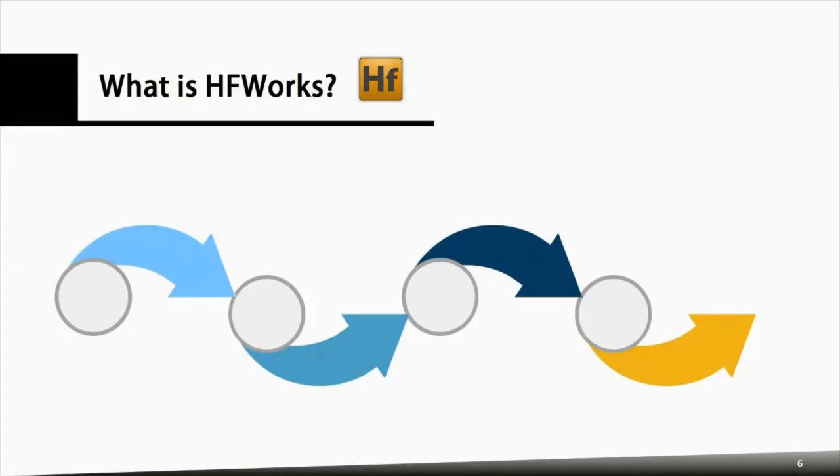A bit more about HFWorks: it's essentially a 3D electromagnetic simulation package based on the finite element technique in the frequency domain. The workflow is straightforward. We start with the CAD, which has to be created, imported, opened or edited inside SolidWorks. That's the SolidWorks front end. HFWorks sits as an add-in inside SolidWorks, so it's not a separate piece of software. It's really part and parcel of SolidWorks.

Once we have the CAD model, we go through a pre-processing phase, which is essentially setting up the materials and the boundary conditions and all of that. And if there are any parametric studies or multiple configurations to be analyzed, that is done and set at the pre-processing phase.

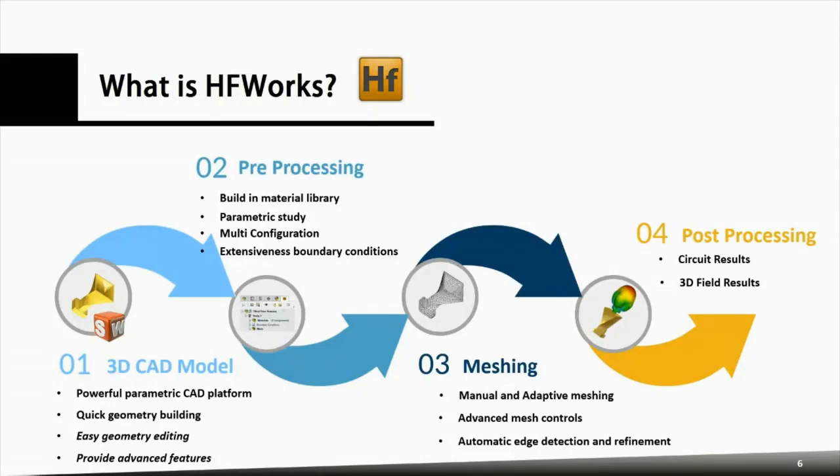Then we do the meshing. For people who are not experts, it's probably preferred to use adaptive meshing. Those who are quite knowledgeable can cut solution time by controlling the mesh manually and getting automated mesh refinement that the software intelligently helps you accomplish. After that, we go through the post-processing and look at the results: the field results, the circuit parameter results, or the antenna parameters, as it would be in this case.

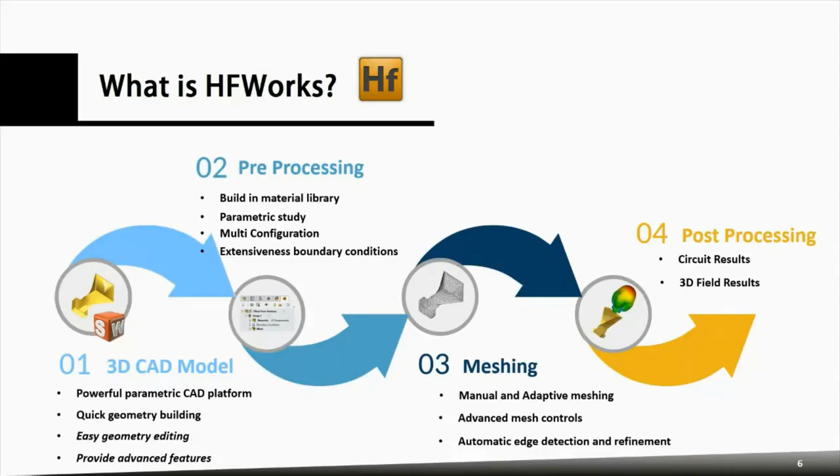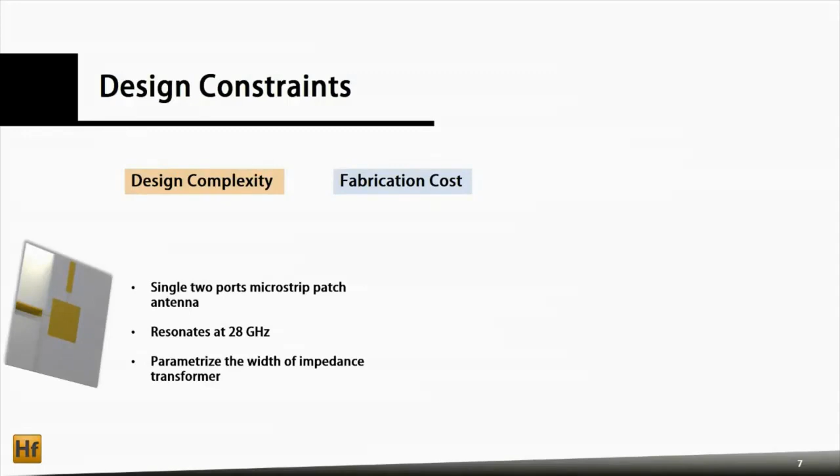So to show this, today we're going to consider a design. We picked an example that illustrates a way to address and streamline design complexity and reduce fabrication costs. It's in the open literature: a 5G 28 gigahertz resonant antenna, and it has a unique feature: it's dual excited. The basic element has 2 excitation ports, and out of that you can build an array.

Okay, and I'm showing here a single cell and a 2x2, but you can also go higher. And the interesting thing about this design is that you can actually do beam steering with less number of ports, and I can share with you the reference paper if you're interested. And basically, the idea is that you can use this kind of excitation to go, if you go to 3x3, you can actually excite the additional element without additional ports. So that's really one of the concepts of this example that we picked.

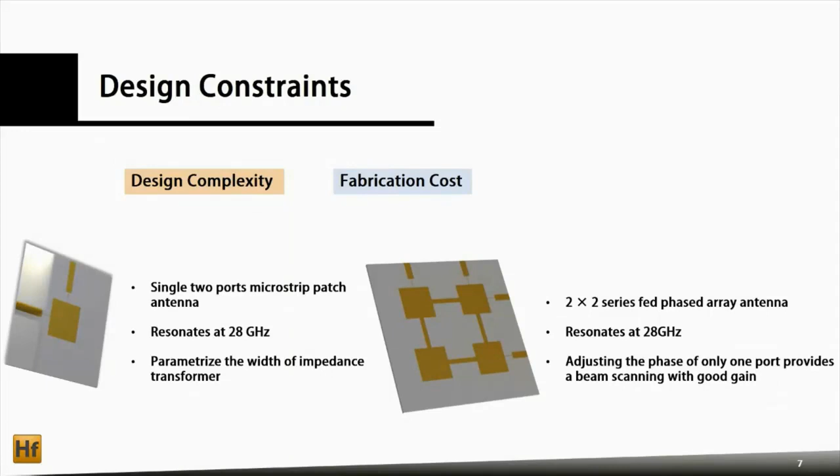And so at this point, I would like to switch over to SolidWorks, do a live demo of what we're getting and how we simulate this, how we set it up, how we get the results. Okay. And that will be switching over to this SolidWorks.

So this is a live view, obviously, of the SolidWorks interface. I have here the 2 examples. I'll switch over to the model. So this is my array, okay? And in another window, I have the single element design.

Show this. For some reason, I'm showing a black screen. Adam, can you confirm that the screen is black for you? Yes, sir, it is black. I'm not sure why this is the case. It's hiding my model. So let me, at any rate, let's see, maybe this will help set it up.

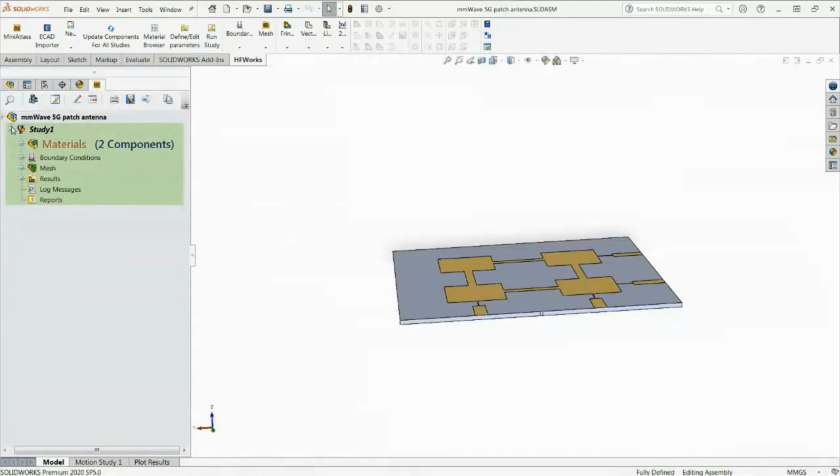So basically, what we're looking at, this is the SolidWorks interface. And maybe I can go back to this model where we can see the model now. Yeah, so this one is the 3D assembly of the array. I wanted to show the single element. So the idea is that inside SolidWorks, this is where you actually build the structure, the CAD geometry. And as I mentioned, it's quite powerful. You can do very complex structures, fully 3D, fully parametric, and so on. And here, for example, we're hiding the air, but you can see that there is an air box around this that we need to do the simulation.

And we are inside SolidWorks here. And once this model is ready, then this is the HFWorks environment where we do the simulation. So you see the name of your assembly, and you see that HFWorks has this tab which is added in. So it's really part and parcel of SolidWorks. It's fully embedded in SolidWorks. And then you have this menu, and if you have more than one product of EMWorks, then you see them here. And in this case, we have the HFWorks product.

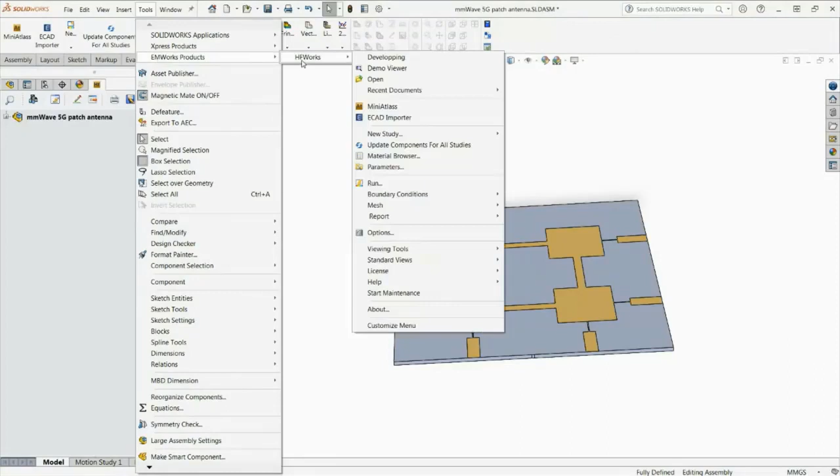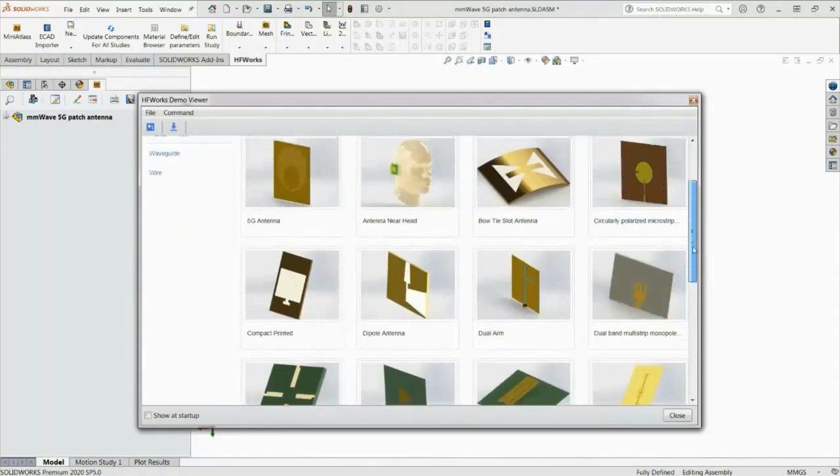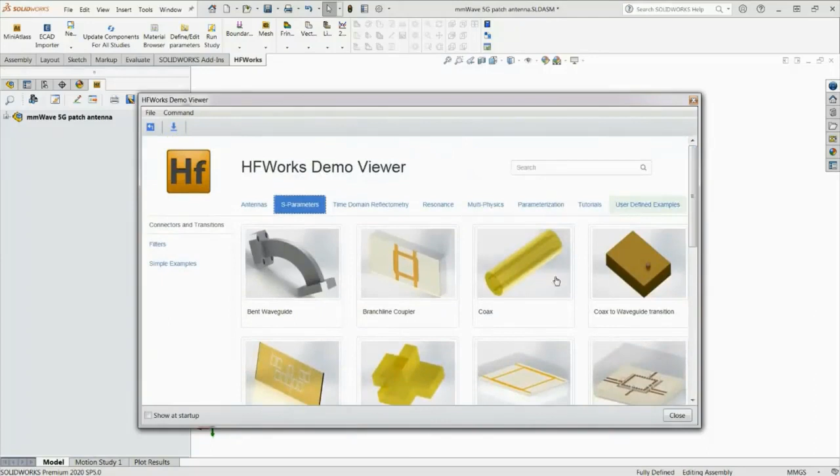And if I go and open the demo library, this is where you can navigate a whole bunch of examples, the kinds of things that you can do. Obviously, in the antennas, you can have many different types of antennas, and all of these are easily accessible. The geometry is ready, everything is set, and you can have them in planar, or you can have some antennas in waveguide, or some wire antennas, and so on. And then if you go to S parameters, you can also have a whole bunch of different structures, what kind of models you can build and test inside HFWorks, to do some filters and all kinds of connectors and transitions and so on. And there are examples for TDR for people who are interested in time domain reflectometry.

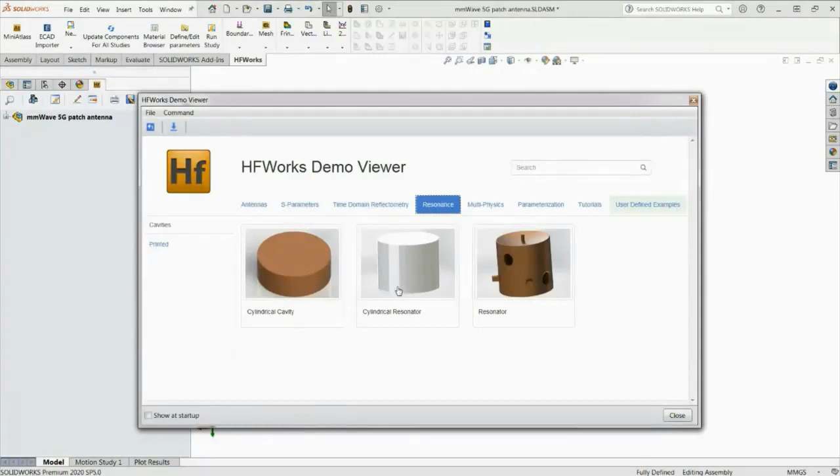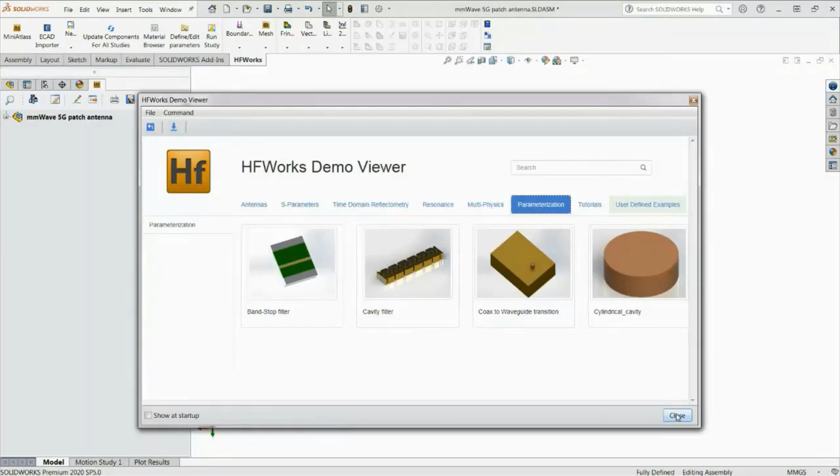And HFWorks does also have a resonance solver, so it looks for the eigenvalue solutions for different resonant cavities. And it comes also with a few examples of multiphysics, so electrothermal problems, whether for antennas or S parameter heating applications or heat loss in structures. And there are obviously some examples where parameterization is used, for example, to tune a filter, or to optimize the coax to waveguide cavity transition, and so on. So this is a good starting point for those who are interested to learn more about the software. You could start here and look at these examples, and there is obviously a tutorial library and so on. So this gives you an idea about the spectrum of applications that you can do with HFWorks.

So now let us get back to the subject matter of today, and let me just see if this model, maybe if I close this window and reopen it.

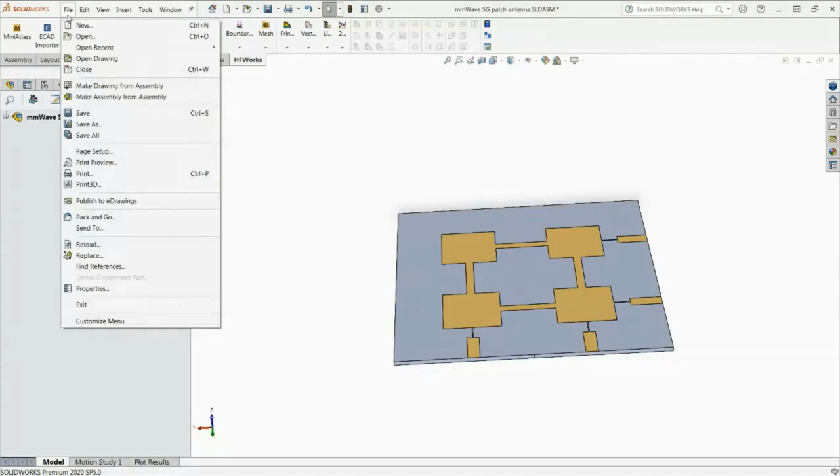So maybe now I'll be able to open recent. This one. All right, so I think that there was a...

So actually, I want to start with the single cell model and just walk you through very quickly how we analyze this. You can see here that I already have two simulations. The process is really straightforward. You go here and you say, I want to study this antenna. And you have here types of simulations you can do. You can do antenna, S parameter, time domain, or resonance analysis.

So for doing antennas, and the menus, by the way, get configured according to the study type. So here there are a few options to set up for your simulation. You can set up your frequency sweep, the meshing option, adaptive, manual, and so on. You can fully control this. And if you're doing any thermal coupling, electrothermal analysis, you can. So I'll just go ahead and say okay, I didn't set any frequencies or anything.

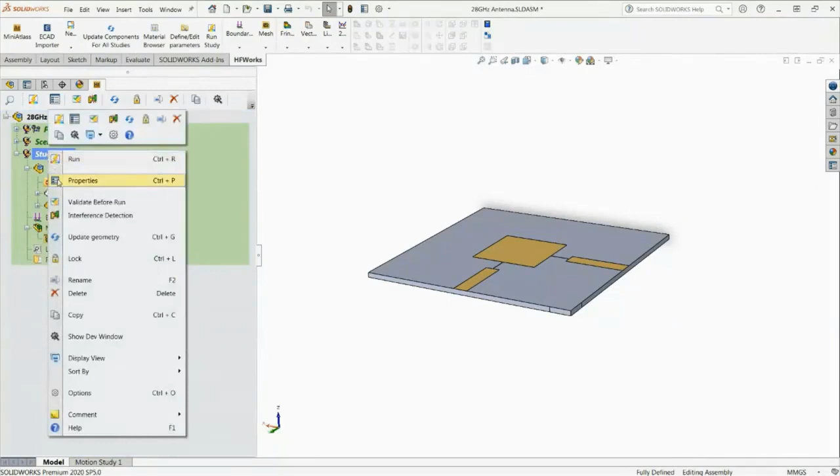So you notice here that we create this study, or a simulation scenario, if you will. And at any time, if I want to edit this, I can go back to the properties and play with this. So for example, if I wanted to only look at the port simulation, the port impedances and so on, I can do this port simulation. If I wanted to do parameterization, if I wanted to save or not the 3D fields, if I want to look at fields or am just interested in this S parameter.

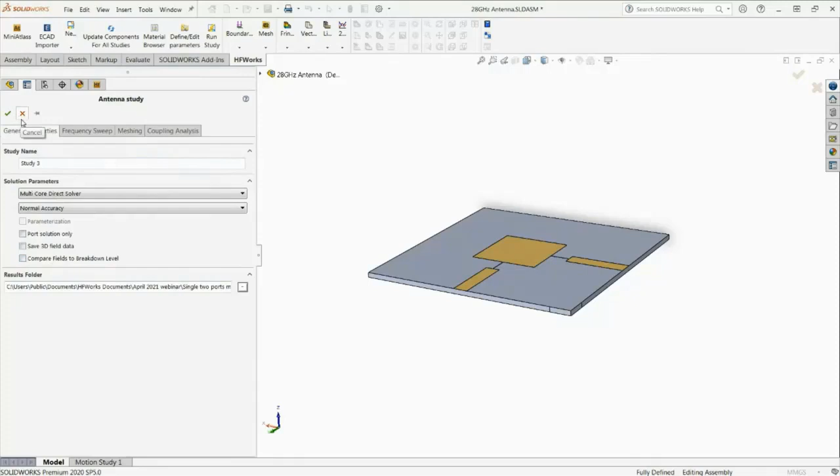And one of the other features is this power handling capability, which allows us to compare breakdown fields. So if you're doing a high power application, you might want to look at that. So all of these, you can edit them and change them at will. So if doing parameterization, you see here that the icon of parameterization will pop up and let us know that this is a parameterization study.

So what we've done in this antenna is actually simulated this, and we tried to optimize this transition to feed the antenna properly, and that is very sensitive to the width of this narrow microstrip line. So we did the parameterization to compare different scenarios, and you see the width here is 0.02 to 0.05 millimeters. And once that was done, we actually simulated the optimal scenario and dove deeper into the details of that simulation.

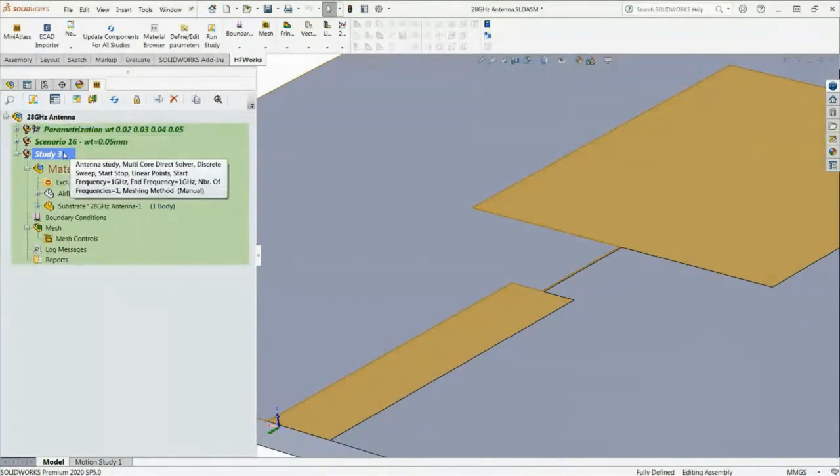So how we did this, I'm going to get back to this shortly. I'm going to just walk you through the process in this study, which we're not going to simulate. So by the way, if I wanted to set the frequencies and so on, you can see this is not set up at 28 or any of these things. Or if I want to shortcut things, I could just drag this study onto this one, and then I inherit everything. So this study now is fully set.

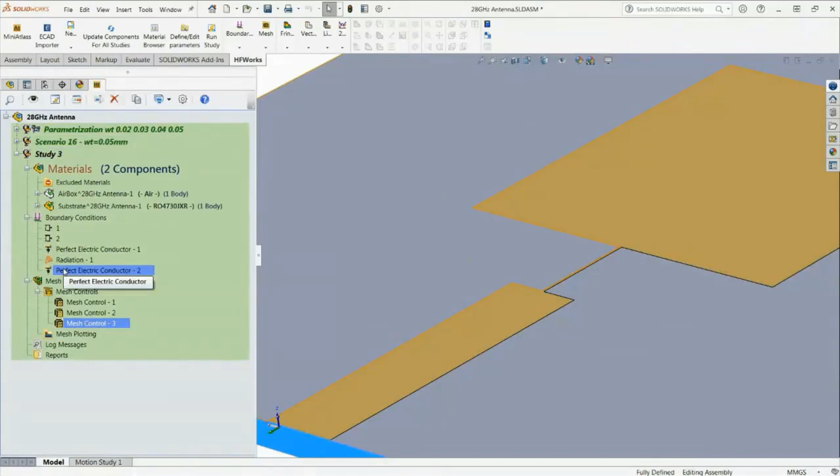If I go back to these properties now, you notice that my frequency setup is now a proper frequency. So it's very easy if you want to do a new simulation based on an old one and just adjust the parameters that you need. But if you're starting out and you want to set a study, you can see the three main building blocks are material definition, boundary condition, and mesh. And as I said, you can do automated adaptive meshing or manual meshing. In this case, we've done manual meshing because we know exactly what to expect and where to mesh, and it saves us a bit of time versus waiting for multiple adaptive passes.

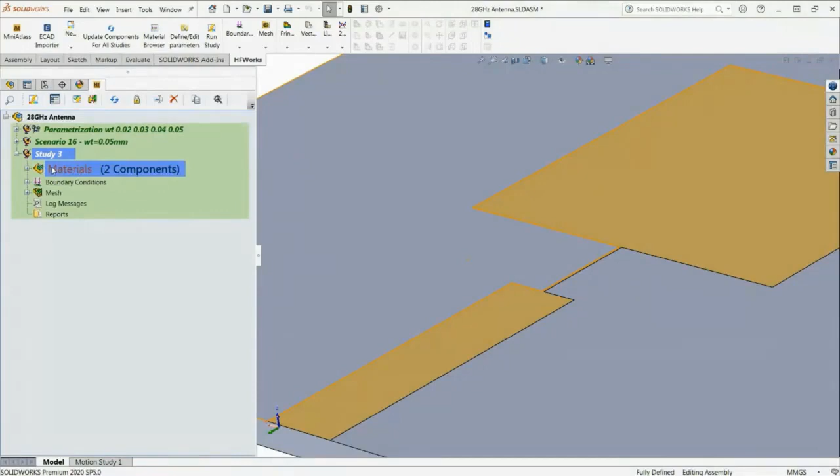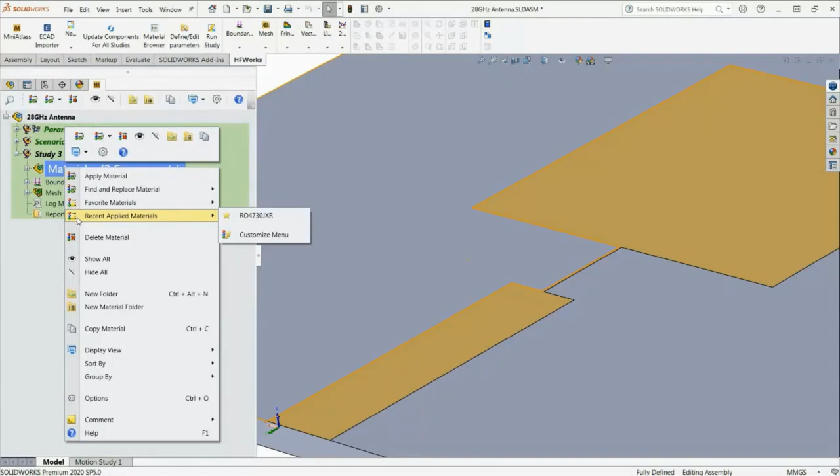So the process of material application is straightforward. You can go to the material library by apply materials. You can find the material and replace the material. You can use your favorites, and you can populate this with your favorite materials that you use. Or if you've used a recent material, you find it in these materials. So in this case, we're using a Rogers substrate on which we've done this. So that's the material that I recently applied. So to apply materials, you go to this.

You can apply materials part by part, or if the part has bodies, you can apply body by body. In this case, each part has a single body. So I can go here, and this is what the material library looks like. You can search for a material by name or browse them by category, so they're grouped by categories.

For substrates, for example, we have the whole gamut of substrates. We have the Rogers materials here. And then if you apply a material, let's say this Rogers material, now that material is applied, and you see it there. Of course, I applied it to air just to illustrate the point.

But I can drag this onto this one and say this is actually my material. So this now becomes the Rogers. And I can go back to this one and say this is actually air. It's straightforward, to see how easy it is to play with these things.

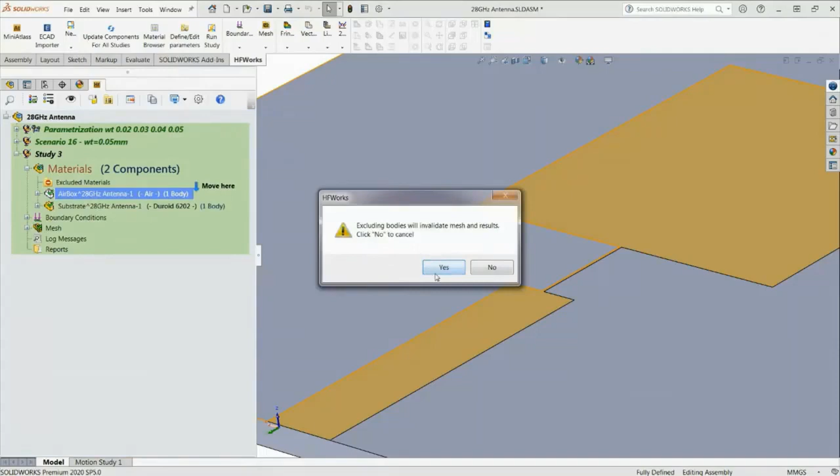The other neat feature about materials is that as we are embedded inside SolidWorks, you can have some mechanical parts that are not relevant for simulation. So we have this folder where you can just drag things that are not relevant and exclude them from simulation. It will give you a warning and so on, but if I did this, then that part will not be considered in my simulation. So it's an easy way to work with true mechanical designs from your mechanical engineer.

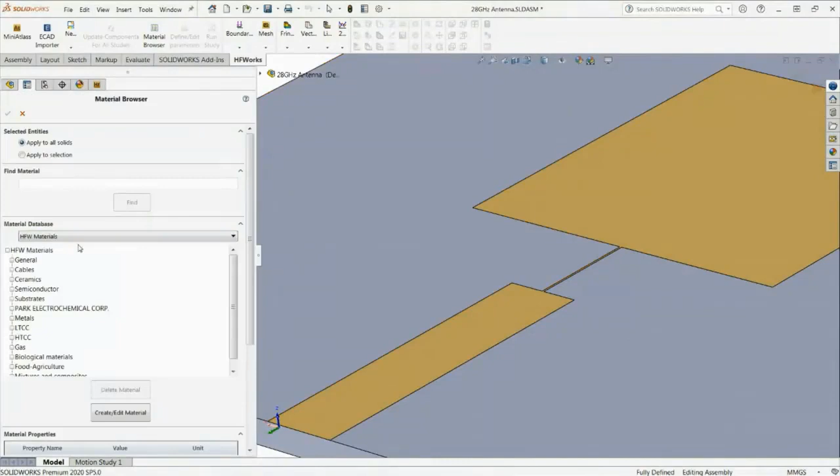So the idea is materials is very straightforward. There is even a nice feature that I usually like to mention: you can create a materials folder. If you have lots of bodies, let's say you want your substrate to be a Rogers substrate, this one, and you have a lot of materials to apply, you can just select a bunch of bodies with control select, and if you drag them into a folder, then they get applied that way.

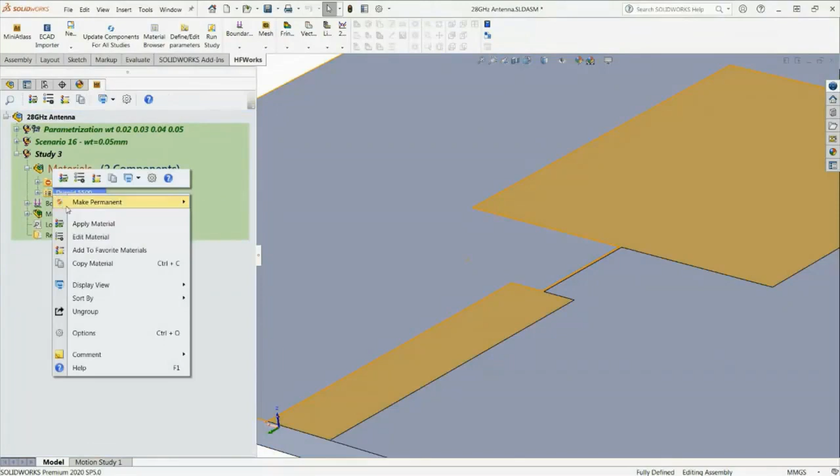And you can make these folders permanent, for the current study or all study types. So now, whenever I open a study, I'll have this folder because I'm always working with it, and I apply material by just putting bodies in there. So this is briefly what you can do with materials.

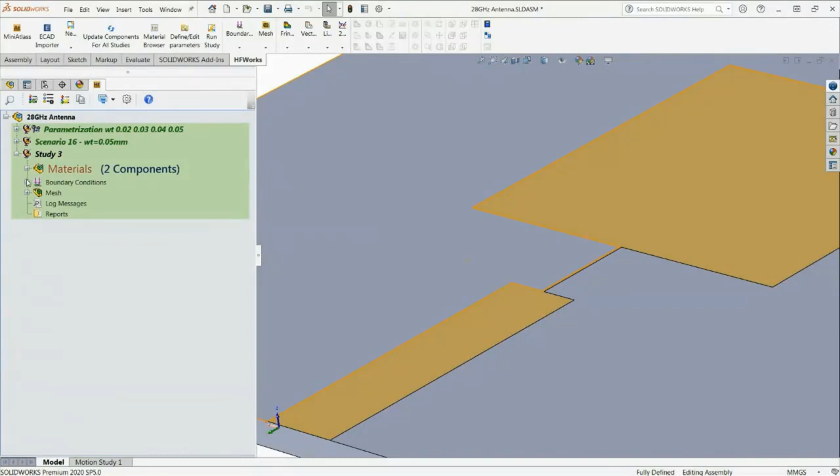The next step is boundary conditions. In this case, we have to define ports. You notice here it's giving me these warnings because I excluded some geometry that was in the original definition. But the port definition is really straightforward, and I want to illustrate this.

The way you define ports, you have the geometric entities and then the properties of the port. The geometric entity is straightforward: ports need faces. So this is, let's say, my port 1. It has a face, and then you can set if it's differential or single-ended, and if you want to calibrate this port, impedance, power, voltage, and so on. And you can control the number of modes of that port, so you can do multimodal S-parameter simulation.

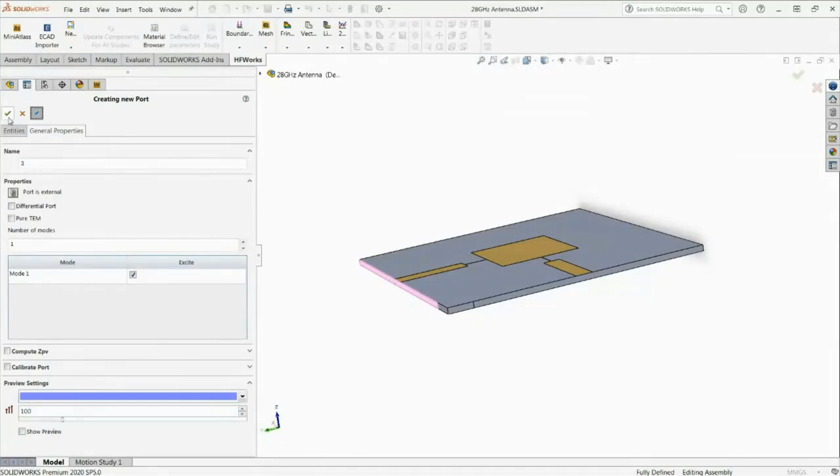Sometimes in complex geometries, you want to see what that port is. So this illustrates to you what port it is, so you can recognize your feature. You can pin this. So if I have 5, 6 ports, I say OK to one, and then I move on to the next one, and I'm doing the second port. So this will be my second port, for example. So in one shot, you can do all of these things.

For the boundary conditions for antennas, you have all these types. You can have multiple ports, symmetry, perfect electric, perfect magnetic, symmetry conditions, impedance surfaces, and obviously you need the radiation boundary, which is the outer boundary on the box.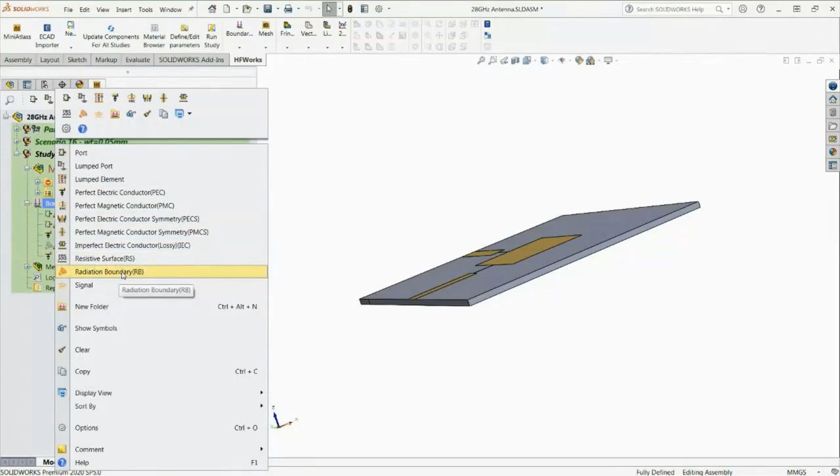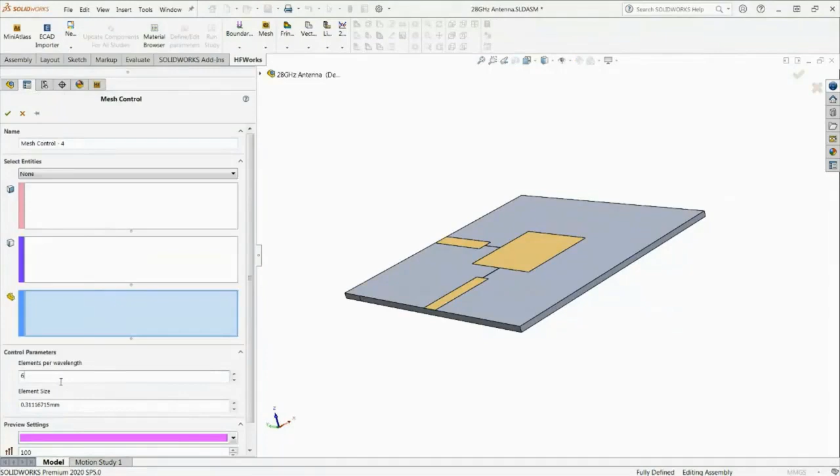So quickly, just to illustrate the capabilities for manual meshing. So here you can see that we have some mesh control. So let me go through quickly how this works. If you want to apply a mesh control, this is where you essentially say what elements per wavelength or what actual element size you want on certain features.

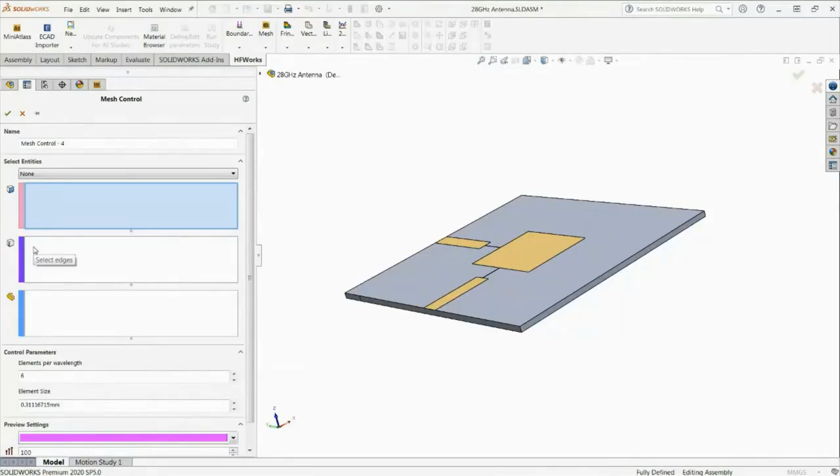It could be on a body, on a volume, and this will override the default element size, which is computed based on wavelength. Or you can go on a face, or you can go on the edge. So typically in high-frequency electromagnetics, really the critical parts are the edges. So let me show you how we actually pick those edges. This is actually quite tedious if you want to do it.

So the idea is, in this case, we only really want these faces. This is the conductor face. And all we need here is really those edges. So we can right-click here and then extract the edges. You've done that in one shot. So on these edges, since I'm doing second-order elements, instead of going 6 elements or 0.3, I can do, let's say, twice that. So it will update for me the average element size.

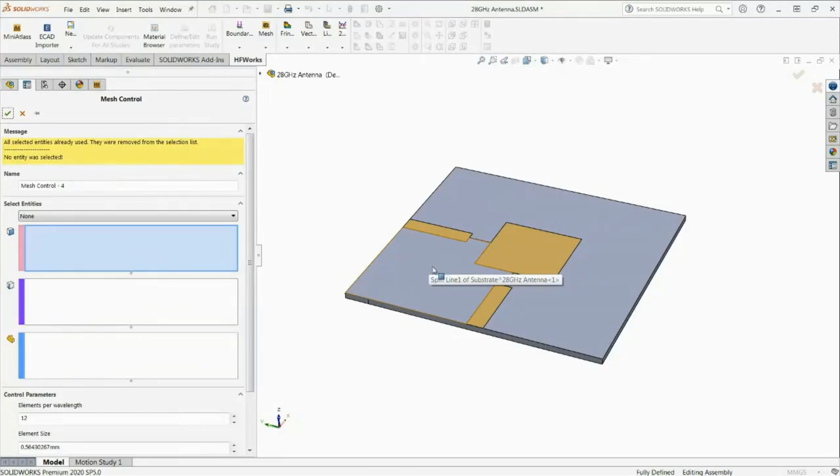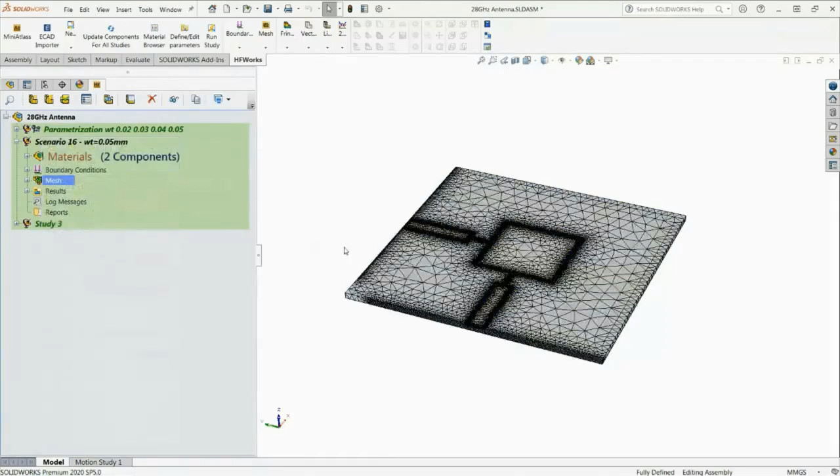So it's telling me that those entities already have those mesh controls. So when we do this, and then we create the mesh, you see that your mesh is actually following those instructions. Let me show you what that mesh looks like. You can see that without waiting for adaptation, I already got this nice transition mesh. It might be over refined in places, but you still save time with a single pass, and you get very accurate results.

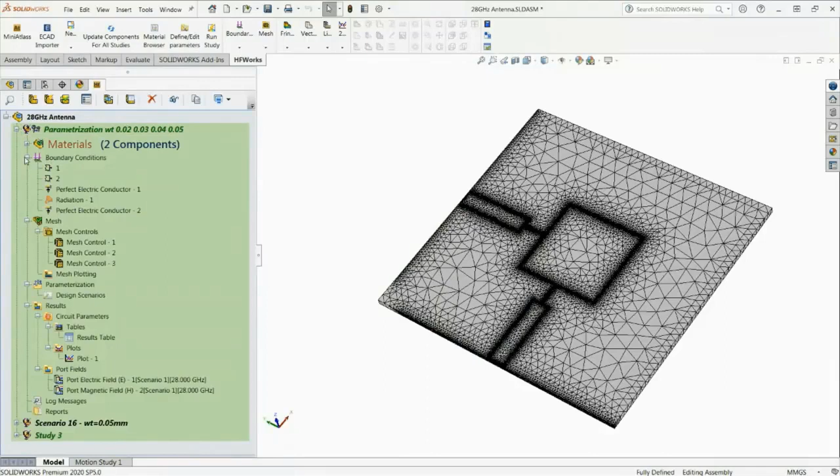So this is very briefly how we set up the problem. So let me go back now to our first study. We have an antenna part which is hidden. I can show it from here as well. So that's my air box. This box is dimensioned such that we have enough distance from the radiating element. Typically the further you go, the more precise your radiation pattern is going to be, but you don't want to be too close, less than a half wavelength. In this case, we took a full wavelength to have no issue with the boundary itself.

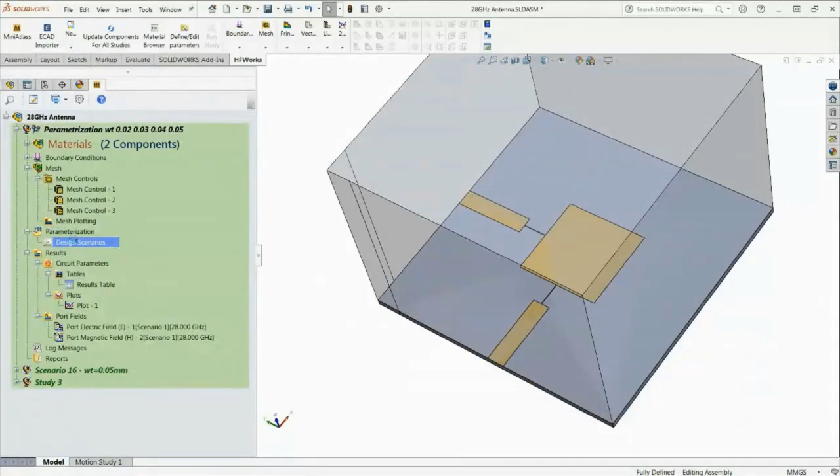Then we can look at the port. This is one port, that's the second port, and this is our radiation boundary. Then we have the perfect electric conductors inside. We have the mesh control that we saw. And now this is the parameterization. In this study, we were not sure what should be the width of those transition lines, so we created a number of scenarios to parameterize. There is a unique feature you can use: PDP, physical dimension parameterization. We can parameterize things in millimeters or centimeters, whatever the unit is.

So we assign two widths. We could independently vary this one and this one, and that gives us two dimensions, D1@Sketch. You can see this is referring to the entity in SolidWorks, and this is the second dimension. We vary them between 0.02 and 0.05 in steps of 0.01. You can parameterize other parameters as well, and then you generate the scenarios, and we have generated 16 scenarios. We picked a few of them, wanting both to be 0.02, both 0.03, and so on. So altogether we have 4 different scenarios that we simulate.

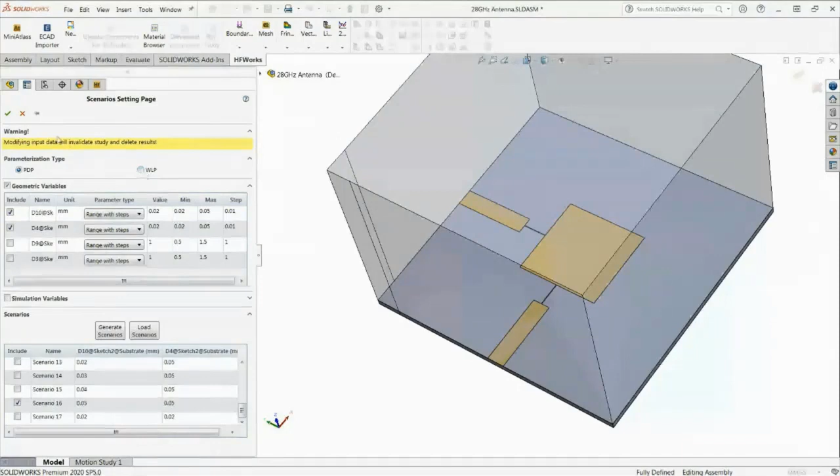You can also parameterize simulation variables, not just geometry. This is physical dimension, but you can also parameterize in wavelength. This is very interesting if you're doing wideband antenna design. If you want certain dimensions, especially the air box, to always be lambda/2 or lambda, you can pick this wavelength parameterization, and it will allow you to parameterize things electrically. As frequency changes, the model dimensions will be adjusted and simulated accordingly. That's really a unique feature this parameterization offers.

So now, by the way, when you go to the meshing and want to show mesh, you can see we have different meshes for different scenarios. They're going to look very similar because we're just changing this inner width here.

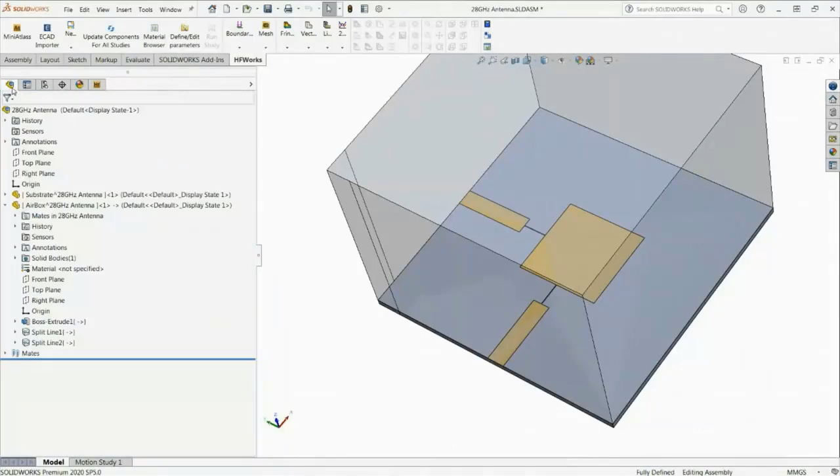So let me go back and hide the air box here, to focus on this. And now the difference is what you see here is that we have this parameterization. We have the results. So you can see here in this study, to get the simulation done, I was basically interested in the S parameters, so I'm showing this S parameter plot.

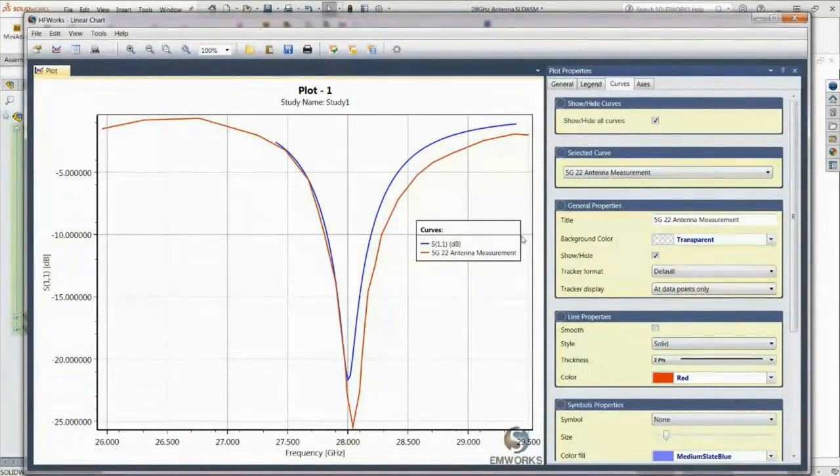And when I plotted this, these are my S parameter results. So this is my plot one. And you can see that in blue is our simulation, and in red is the measurement data that we got from the publication. So you can see that this antenna design is pretty good, and the software is predicting quite nicely the resonance of the antenna at 28 gigahertz. So that was really the important thing to notice here.

And as a matter of fact, I can actually go back here and show you how to create a 2D plot. I can pick from which simulation, or I can get all simulations, which parameters, so you can plot S parameters or even VSWR or some other parameters there, and which S parameter in particular. So in this case, we're doing S11, and from which scenario.

So I can do, okay, show me all S parameters from all scenarios, add them, and it adds them in one chart, and then you can actually see what the different scenarios give. And we see that scenario 16, which is 0.05 millimeter, the last one, is giving me essentially the best performance here.

And this is the 2D viewer, and it has all these nice features that you can play with your graph and so on. One of the things you can do is actually look at the data at the same time. And obviously you can move around and look at what your results are at different frequencies, or you can pick in the frequency and control select, so you can look at your data in different ways. With the roll of a mouse, you can zoom in and zoom out, and it's quite user-friendly to allow you to play with how you look at your data.

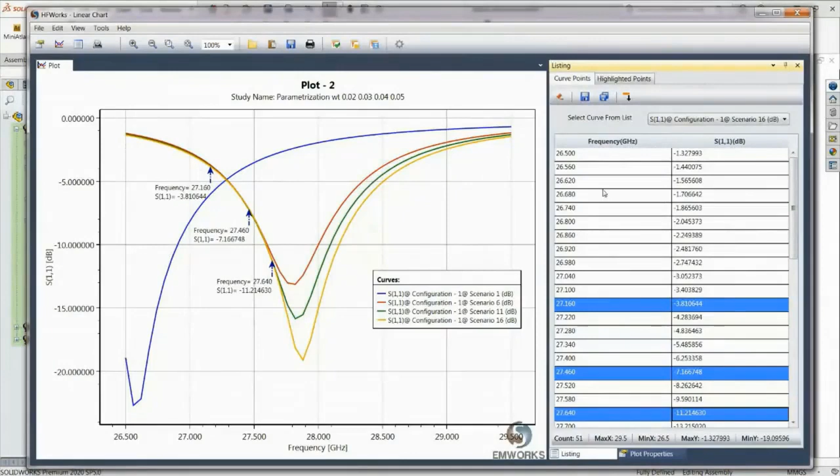So this is the result of our parameterization. This is basically telling us that scenario 16 is the one we should be working on. So my second study here was scenario 16. I did a full simulation. I saved the fields, and you notice the difference now: once we save the fields, we can actually look at far field data, electric field, magnetic field, all those things. If we had losses, loss density and power loss, we can compute that as well.

So let me briefly go over this one. The configurations are really a way for us to set, if you want to add a de-embedding or renormalize your impedance, that would be a configuration. So by default, we're just looking at the intrinsic S parameters here.

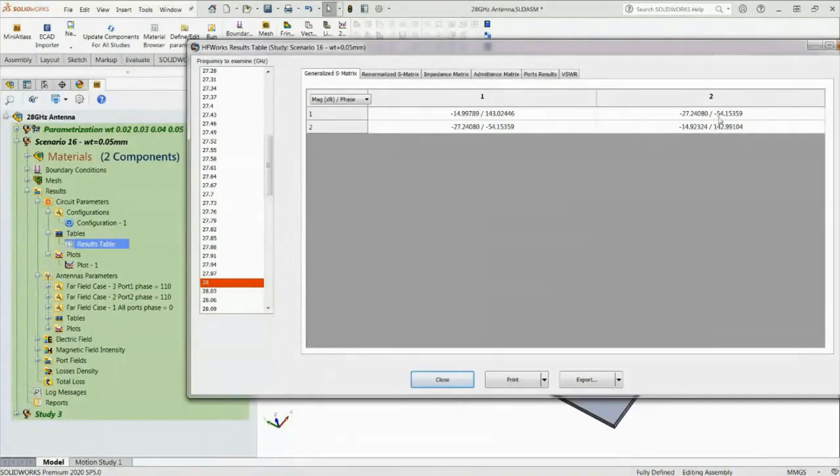The results table is where you see your tabular data, the S parameters, the magnitude and dB, and here we've done this at 28 gigahertz center frequency, and you see that we have about 15 dB return loss. We have 27 dB isolation between the two ports. I could look at the port results, look at my gamma, my impedance, and so on. So all of this is feasible, and you can export the data at any time to an Excel sheet, something like that.

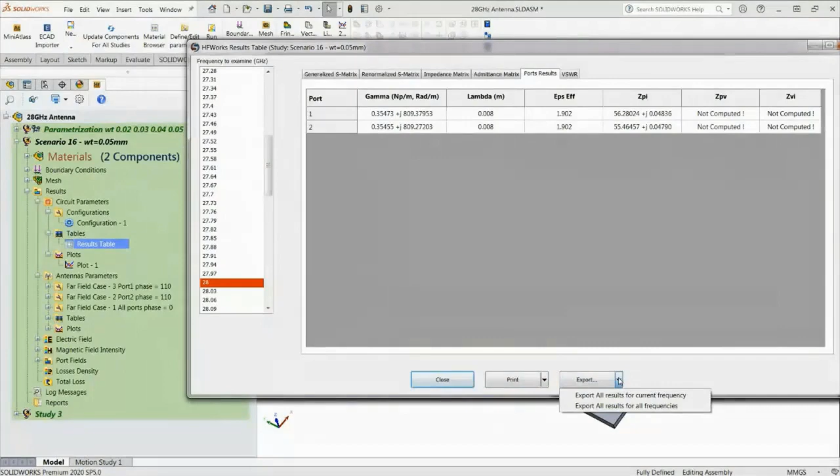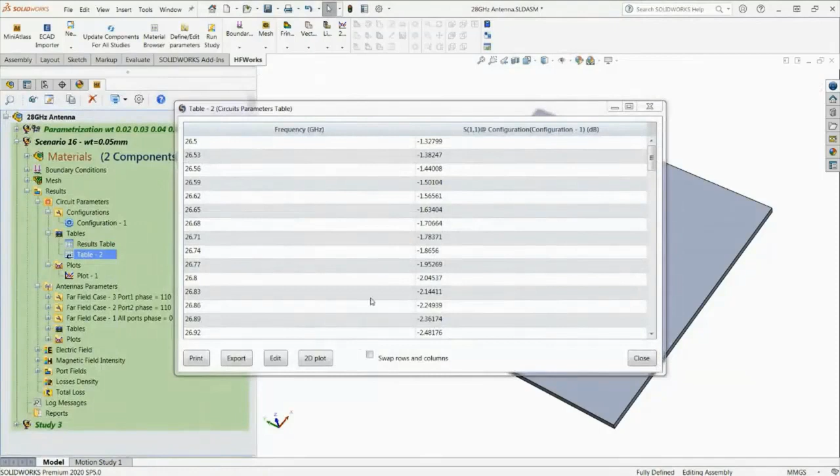If you want to do more with this, you can additionally generate a circuit parameters table. You can just pick one parameter and put it in a table. Or for example, if you wanted to compare different studies, for example different S parameters, the same way we do the plots, you can do this with data. If you have multiple rows, you can swap things around. So it's really quite easy to play with the tabular data. The plots, we've just seen how to do the plot.

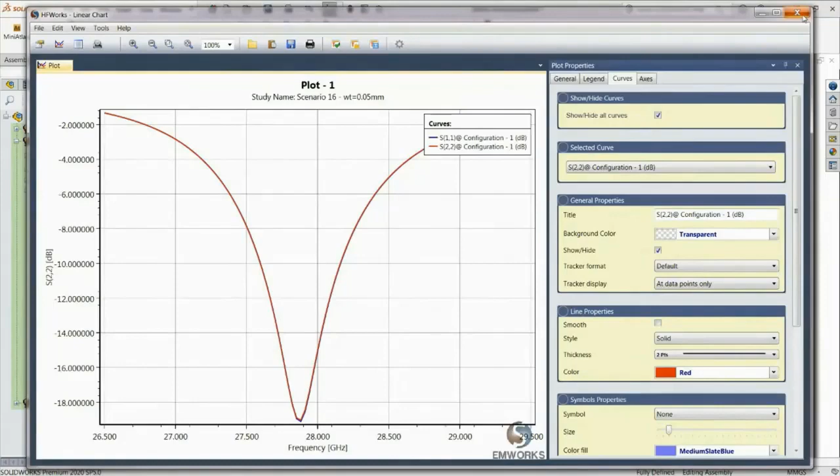So I was showing this plot here, which is essentially now comparing S11 and S22, and because this is symmetric, it really makes sense that they are on top of each other. The structure is fully symmetric. You can obviously go in and put this on the Smith chart and look at the data in this chart as well. And this chart has a similar look and feel to the 2D.

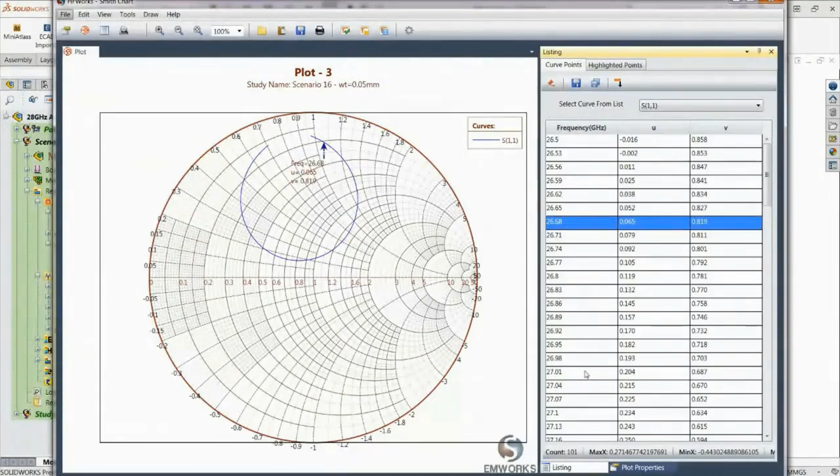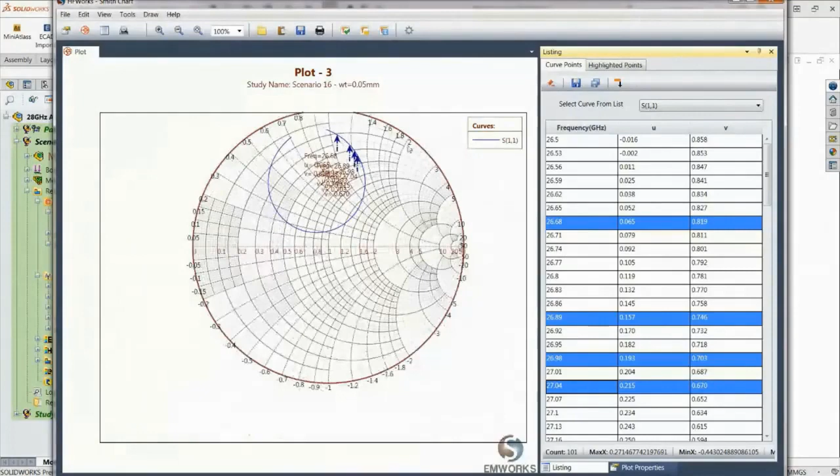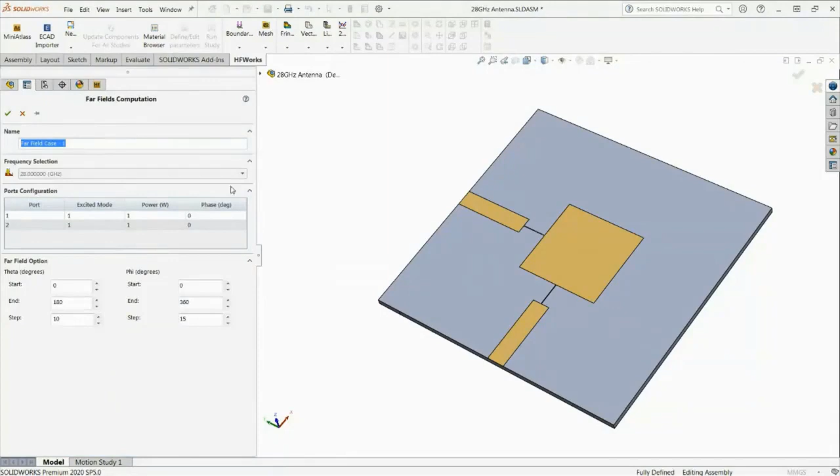Okay. And now to look at the antenna results, we have this antenna simulation section. Every time you want to do a far field calculation, we do a far field case. You can give it a name here. You pick the frequency, and you can decide what excitation you want to put. So for multi-port, for phased array antennas, array antennas in general, this is where we get to set those weights, the power and the phase of each port.

Okay. So in this case, I'm exciting both ports, and here you set the resolution for the far field calculation, how many degrees in theta and phi that you want to do to complete the far field. And once you do a case, then basically it creates the results table for that case.

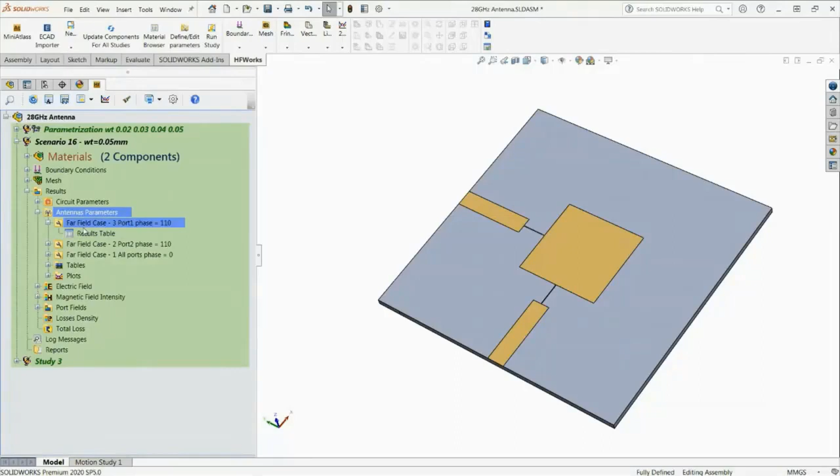So for example, here we followed what's in the paper. We said, okay, port 1 at phase 110, so I can always go back and see what we did as a definition. So port 2 at 0 phase as the reference phase, and port 1 is the 110 difference with respect to it. So what do we get then? Then we get this tabular data.

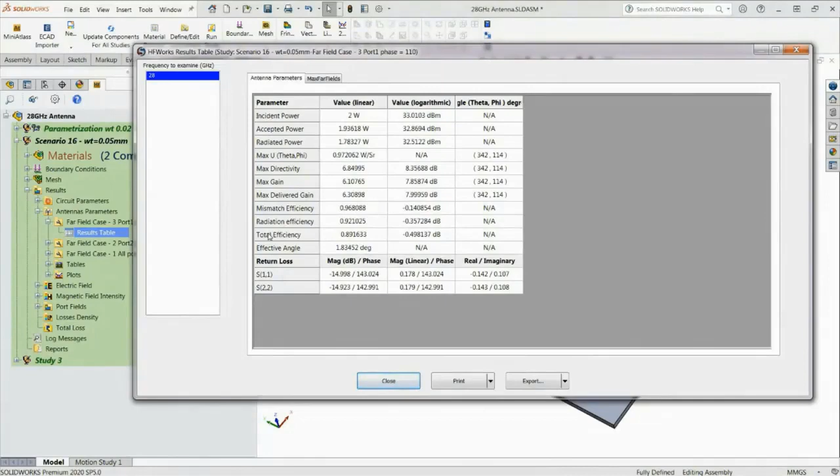So this is where we're looking at what is the return loss at this frequency, and then we have the incident power, 1 watt on each port, and how much is accepted, how much is radiated, what's our gain, and so on and so forth. So you get all of that data. And then if you want to do the plots, here is where you do the plots.

So basically, if I'm looking at far field case 1, I can look at this polar plot. I can look at it in 3D, obviously, zoom in and out. You can see that's my radiation pattern. I can take cuts of it in the theta and the elevation or azimuth angle. And you can see that's a correct plot. And you can obviously do the electric field. You can look at the field in 3D.

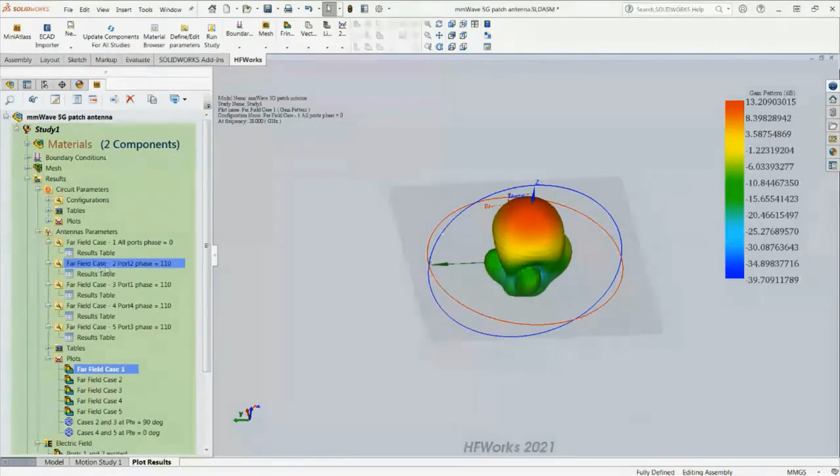Okay, and if I look at the plots, that's case 1, which is all at 0. Then I have this kind of 3D pattern, with my gain essentially oriented in Z. If we do some phase shifting now, port 2 at phase 110, so this is far field case 2, then I can see that it's starting to rotate a little bit, and then you can look at what different phasing will do to this antenna.

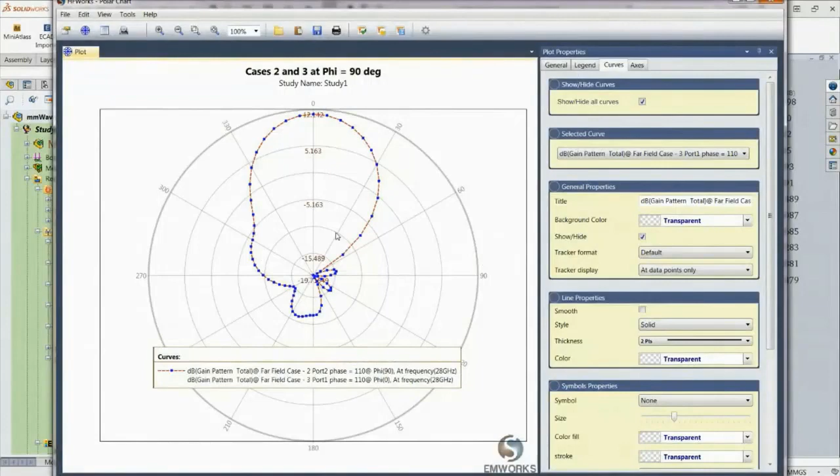Okay, and then here I actually did some cuts, and you can see the 2D cut of the radiation pattern. So we can say case 2 and 3, those two are superposed here at 90. Or I can also look at phi equal 0 degrees for the other. Okay, so we can see how this array behaves. And you can see also this excitation we talked about at the beginning.

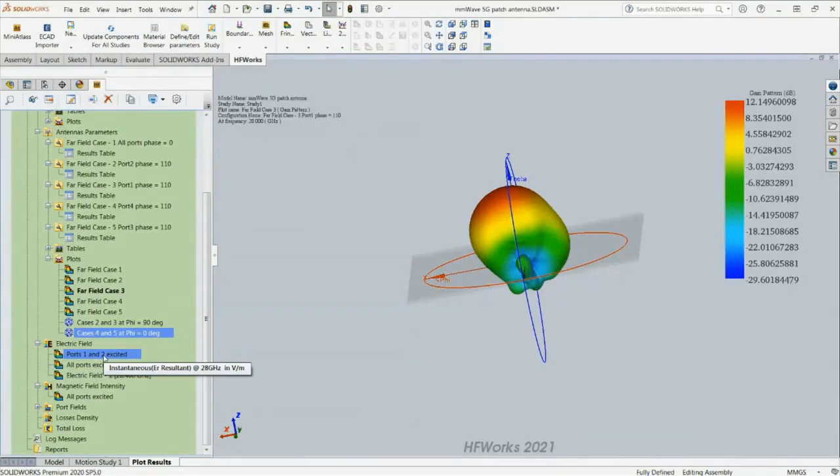So what's happening with ports 1 and 2 excited only? Okay, so you can see that. And by the way, this is my electric field, and I'm exciting only ports 1 and 2. Ports 3 and 4 on the sides are not excited. If I excite all ports, you can see what the electric field distribution looks like.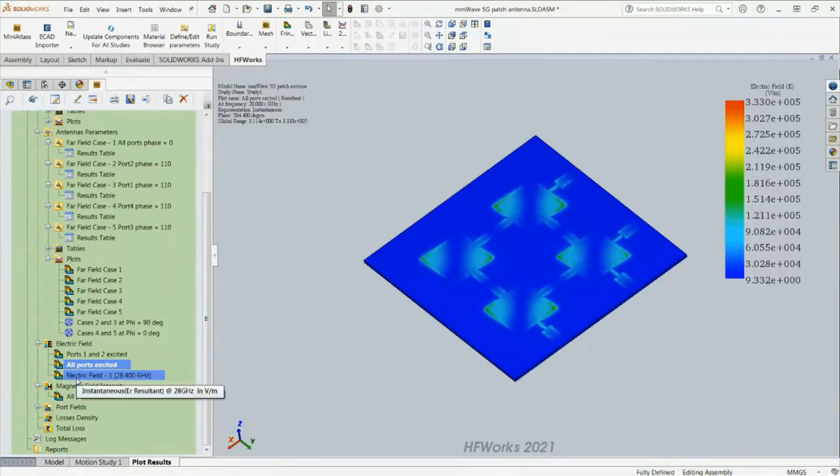So this is port 1 only excited. If you excite only 1, you can see what kind of field distribution you're gonna get, and consequently what happened with the radiation pattern. You can do the same thing with the magnetic field. Obviously, you can plot it, and you can look at this.

And anytime you want to generate a plot, you can also go and do 3D. You can do iso clipping, section clipping. You can do vector plots. You can do streamlined plots. It's a whole bunch of different things. You can also look at field data. You can probe the fields inside the structure, or you can do a linear cut through the geometry, see how the field varies within the geometry, and so on and so forth. So it really allows you to explore your data quite nicely.

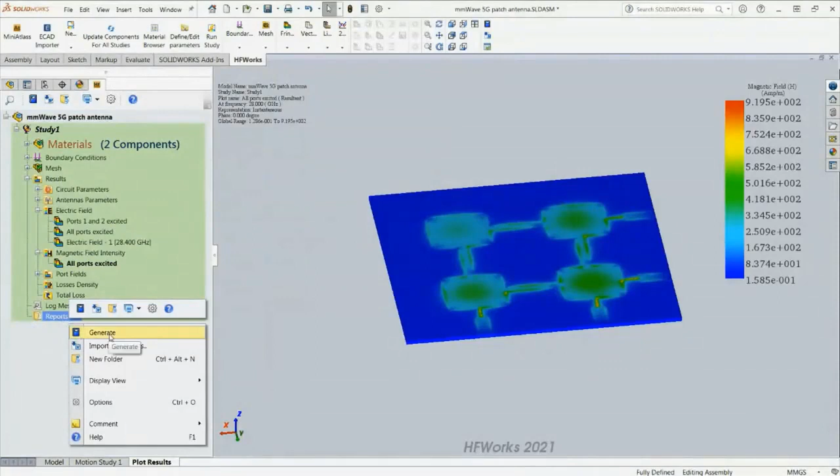And I noticed that I'm running out of time. So let me close by showing this last feature here, which is essentially if you want to do a report, document the data. I won't cover all these details, but we just hit OK quickly and see that instead of doing screen captures and so on, you can just have the whole process automated, and you'll capture all these figures and put them in a document. Then I chose the option to open it in Word.

So this is actually my report inside SolidWorks. So this is my Word viewer, and I have my report inside here, and I can do the editing and all of that inside of SolidWorks. Okay. So basically, I can go to the introduction, or I can go to the results table. And if I scroll down, I didn't write anything in the report generation phase.

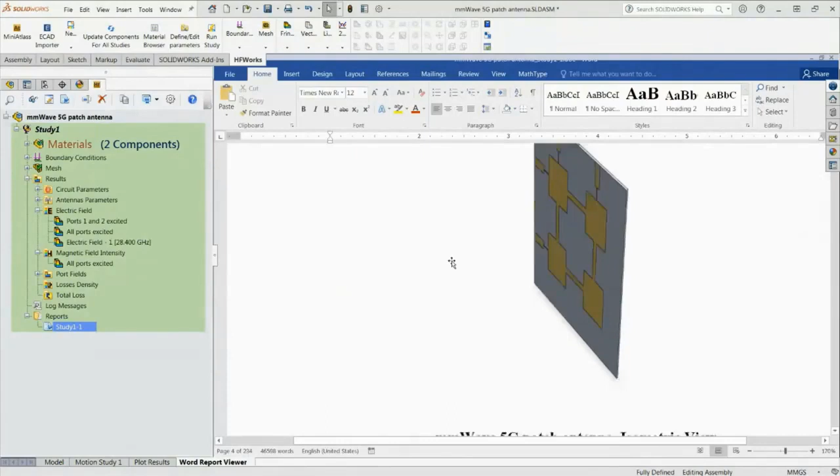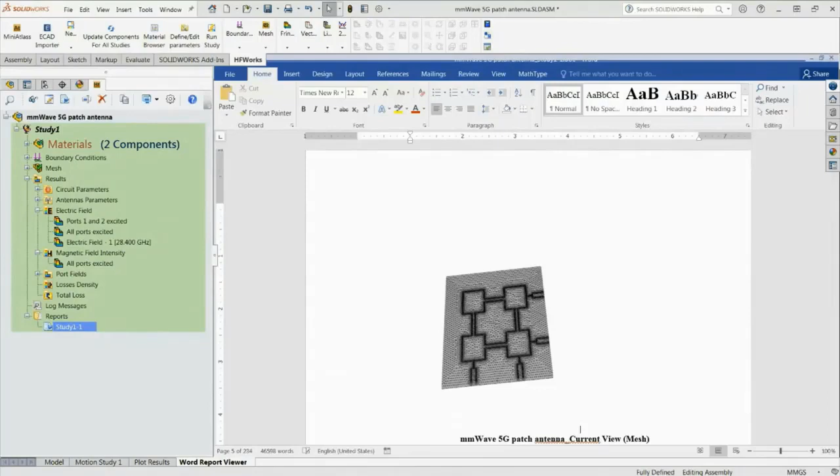But you can see here, this is a Word document from which you can obviously do the usual stuff. Word allows you to format this, crop this picture, and do what comes naturally, and you can even zoom out and see the full page you want. Okay. So this gives you, I hope, a feel for what HFworks looks like. So I hope I showed you briefly these capabilities.

And by the way, again, if you have questions, please. Yes, Mr. Kabir, there is a question here on the chat. I wonder if you are able to see it or not. I can read it for you.

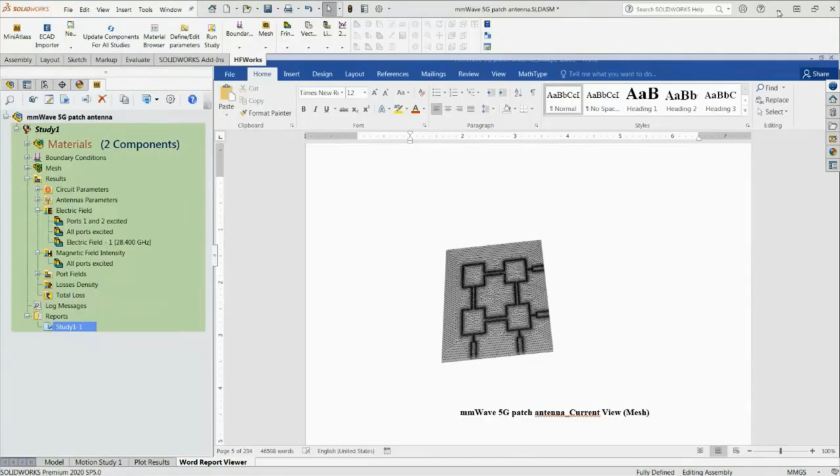Question number one is, what are we inferring from the output graphs of S parameter versus frequency? Also, for instance, S11 is the return loss. The greater the depth of the dip in the graph, the better. So shall I repeat? What are we inferring from the output graphs of S parameters versus frequency? And S11 is the return loss, and it's saying the greater the depth of the dip.

So basically, from an antenna perspective, matching is important for the gain of the antenna. Okay, so the deeper the S11, the smaller S11 in dBs, the more matching.

Are you showing anything right now? No, I'm not showing anything. Okay, all right.

So the deeper the S11 dip is, the better match. It's helping you with better performance, but at some point it becomes marginal. So if you start getting to minus 20 dB, minus 30 dB, really the difference is minor in terms of the antenna gain. But yes, that's the level of matching that you are able to achieve, and matching means you're able to deliver more power to the antenna.

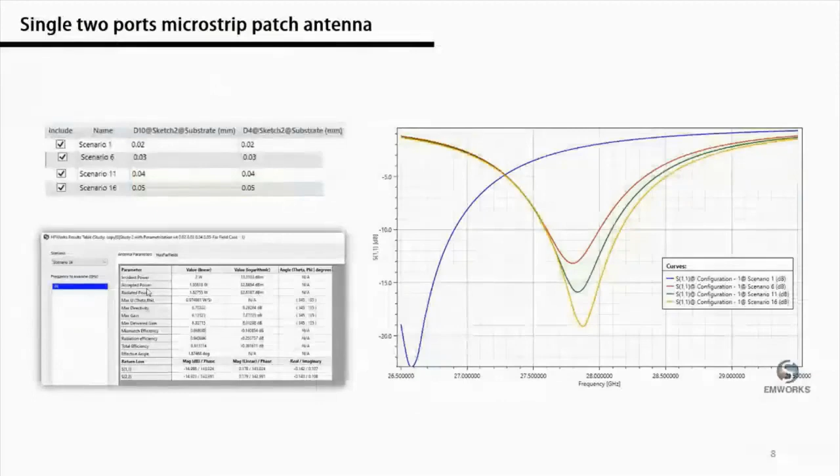So with that, I'd like to conclude this presentation. I think you've seen that you can achieve good agreement with measurements. So simulation accuracy and so on is there. So it's a reliable way to get your antenna designs done. It doesn't cost you prototyping and testing and all of that. So this design that we used as an example just shows you that there are many different ways you can do this millimeter wave stuff, and the proposed design is one of them.

So for the future development, as I mentioned, having the ability to simulate real world products and so on before committing to fabrication is going to be important if you want to innovate quickly and efficiently. And so I think HFworks is a good tool for that. And I hope that you're convinced that HFworks has all you need to deal with antennas or any other 3D electromagnetic structures. And I hope that you've seen that inside SolidWorks, it's a very nicely, tightly integrated and user-friendly workflow.